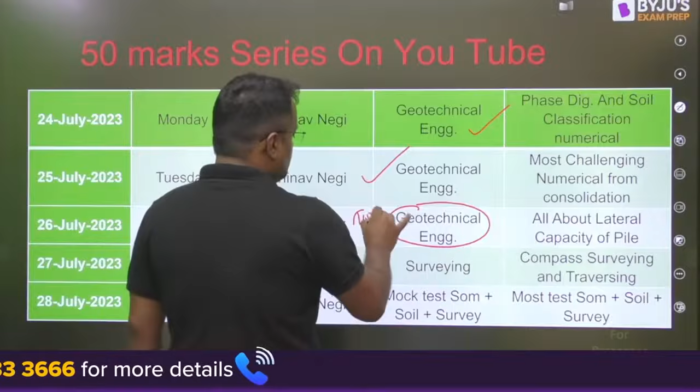So guys, in this 50 mark series, we have done phase diagram and numericals. We did consolidation numericals yesterday. Now we will be doing this today. Tomorrow and day after tomorrow, we will be doing surveying and a mock test on SOM, because I have taken SOM, soil, and survey in the 50 mark series, so that mock test I will be taking there.

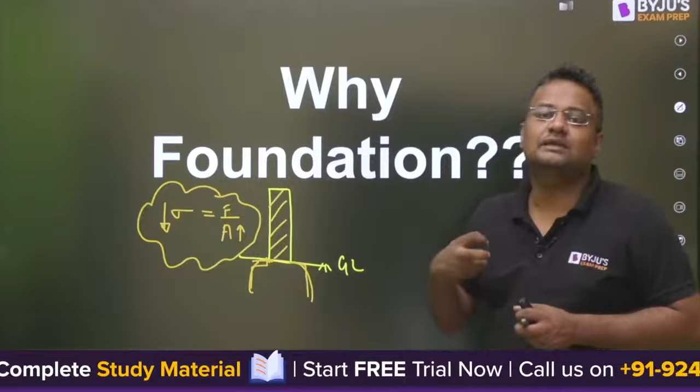So to make it distribute, soil is not as strong as concrete, so we make a foundation with larger area. Stress is equal to force by area, so we make a larger area so that stress is reduced, and this stress should be less than the bearing capacity of soil, so there is no failure. Mechanical engineer deals with force, civil engineer deals with stress. So we make a larger area so that whatever load is here can be distributed.

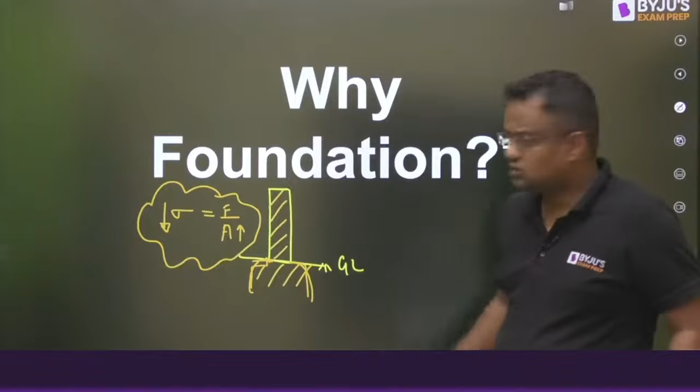Now next question is, what is shallow foundation, what is deep foundation? Suppose at shallow depth soil is not very strong, so either you have to make a very large area foundation. Why large area? Because soil at this shallow depth is very weak. But making a large area, you cannot go into the neighbor's boundary, and cost-wise also it will be uneconomical. So when at shallow depth soil is not very strong, or making a large area foundation becomes uneconomical, in that case we have to go for deep foundation, that is pile foundation.

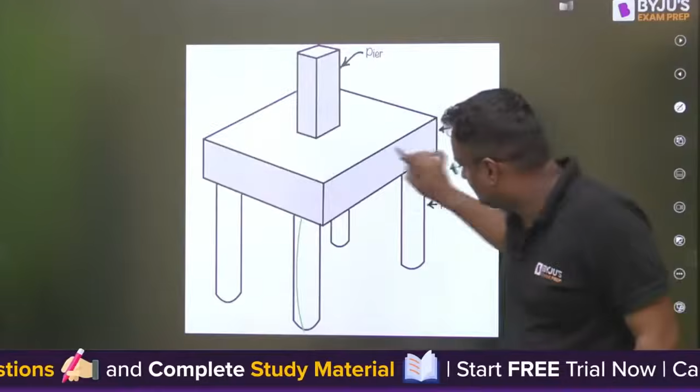Whatever the structures, this is the pile foundation, this is the load, and piles are made. Piles are made such that their end is at the hard strata, because soil at the shallow depth is relatively weak, so they are put such that now the soil is strong, and it gets reaction and bearing capacity from there.

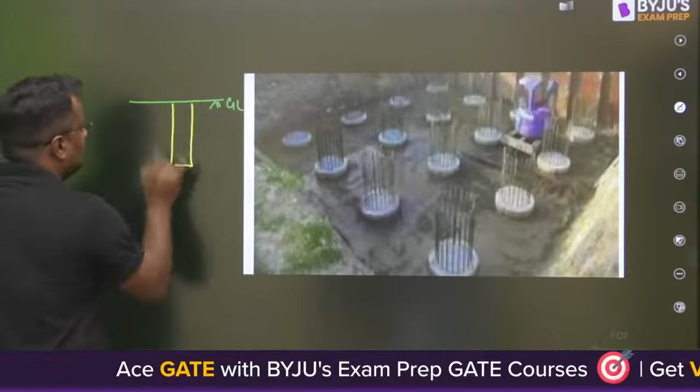Whatever the superstructure, these are the piles. How are piles actually helping? Suppose this is the ground level, and below ground level this is the pile, and load is acting from here, from the superstructure. So there are two ways the pile resists the load.

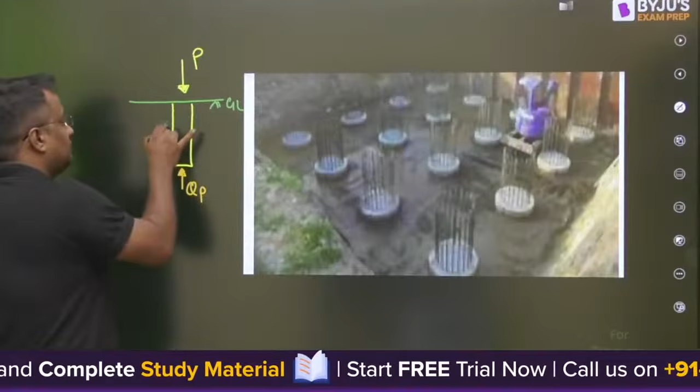One is from here, QP, from the end bearing capacity, if that is put in hard strata, it takes some load. And second is that this P load wants to push the pile downward, so friction will act upward. Friction is opposite to the relative motion. Due to the superstructure load, the pile wants to go downward, so upward friction load will act, that is QF. So whatever load comes from the top superstructure will be resisted by the end bearing and by friction.

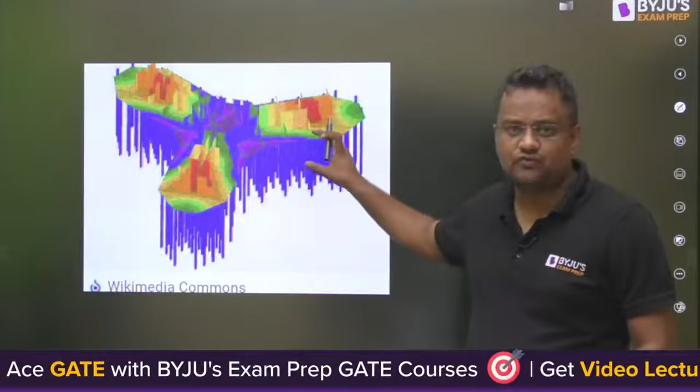Whatever the large structures, skyscrapers these days, like Burj Khalifa or any tall building, even in Burj Khalifa there are hundreds of piles. This is the buttress system of Burj Khalifa. Burj Khalifa has a certain architectural concept called the buttress system, something like this, and these are the piles. I guess 200 or 600 piles are there, resisting the huge load of Burj Khalifa.

The architect of Burj Khalifa has said that with this buttress system, with this core, with this structure, even up to 4,000 meters, 4 kilometers, a building can be made. But of course there are certain drawbacks, that above, atmospheric pressure will be very less. When a person goes up, he may feel dizziness, as certain tourists feel in Leh Ladakh, because atmospheric pressure is less there. So 4,000 meters would mean a considerable difference in that building if theoretically it is made. Burj Khalifa is not that much. So there are some structural drawbacks, and human limitations are also there.

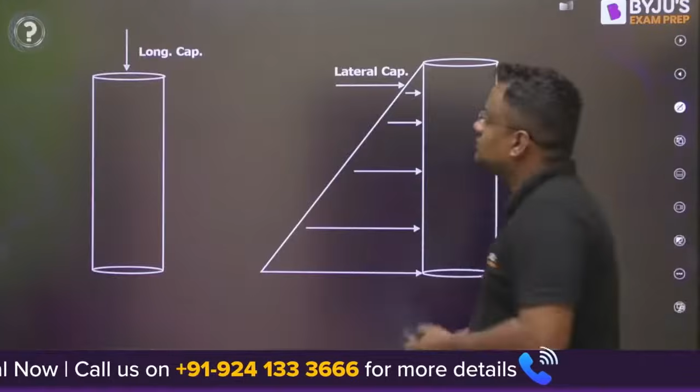Now, whatever you have studied till now in the GATE syllabus is the longitudinal capacity. You studied QU load acted by point bearing and friction, QP and QF, for individual sand pile, individual clay pile, and group actions of piles. That is the longitudinal capacity, in the direction of the superstructure dead load, that is, the direction of gravity. Now the newly added topic is lateral pile capacity.

Guys, lateral load can also be coming. Suppose this is the pile and this is the ground level. Lateral load can also come, due to various things.

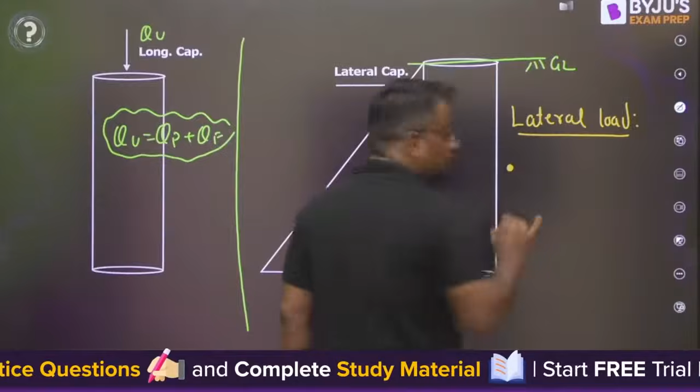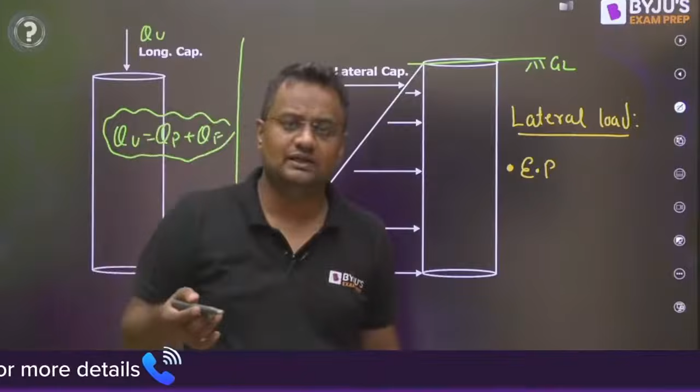Suppose earth pressure is one reason. Since soil is here, from here earth pressure will be there. At any point in the soil, there is a vertical stress sigma V, and similarly there is a horizontal stress sigma H also, that is Ka into sigma V, or Kp into sigma V, or K naught into sigma V, depending on case to case.

So due to earth pressure it can come.

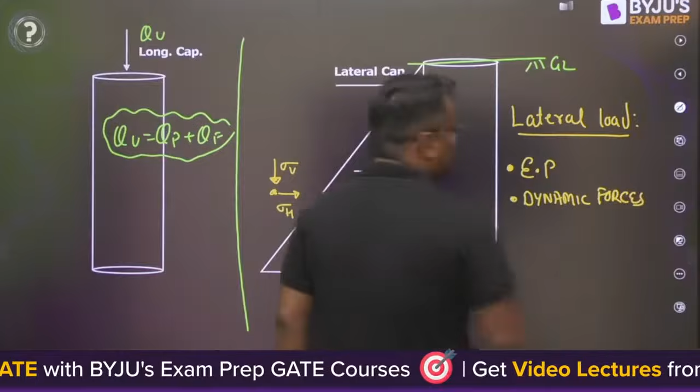Due to the dynamic forces such as earthquake, coming from the epicenter - earthquake force is not directly coming vertically above, the shock waves are not coming only vertically, no.

Okay, hello Priyali, how are you?

So the load can come from the earthquake in any way, so due to dynamic forces also, the load can come.

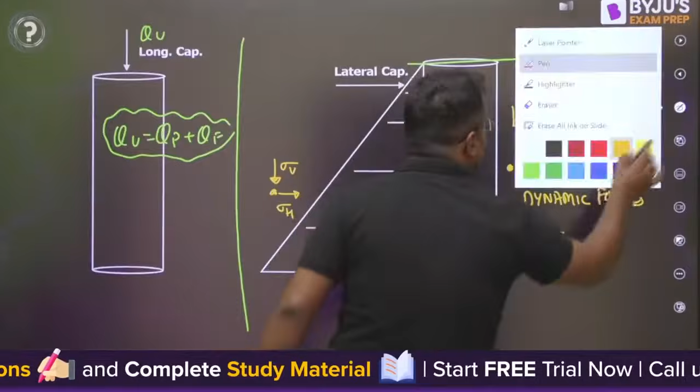Now due to the groundwater table, suppose somewhere here there is a water table. At this point, if the pressure is gamma WH in this direction, then gamma WH in this direction also, because water is hydrostatic - water exerts hydrostatic pressure equally in every direction. So due to the water table, lateral load can come.

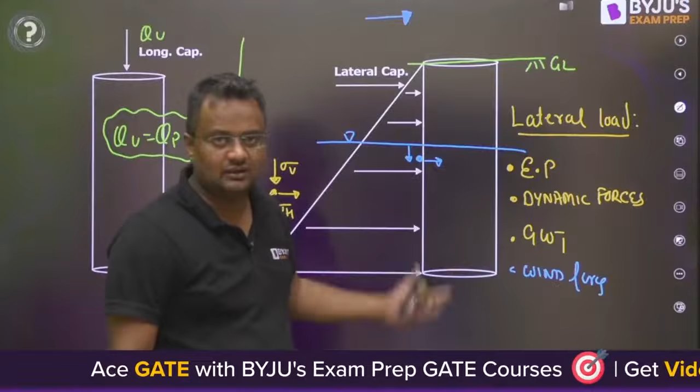Okay, due to wind forces also. Wind will not be below ground level, but wind will be acting here, and whatever wind load is exerting force on the superstructure in the horizontal direction, a bit of that effect will also come in the piles. So due to that also, lateral load can come.

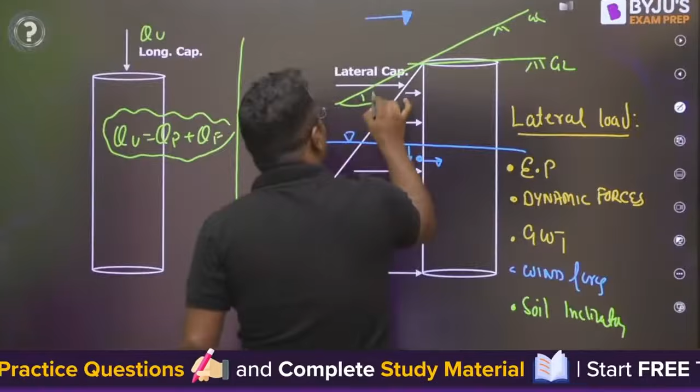Now one more thing, due to soil inclination. Suppose the soil is not exactly horizontal, suppose the soil is inclined with a beta angle. Now the mg sin beta, the weight component, will also be providing lateral load.

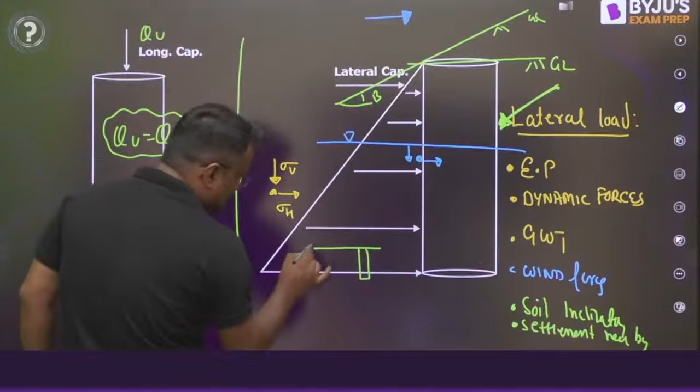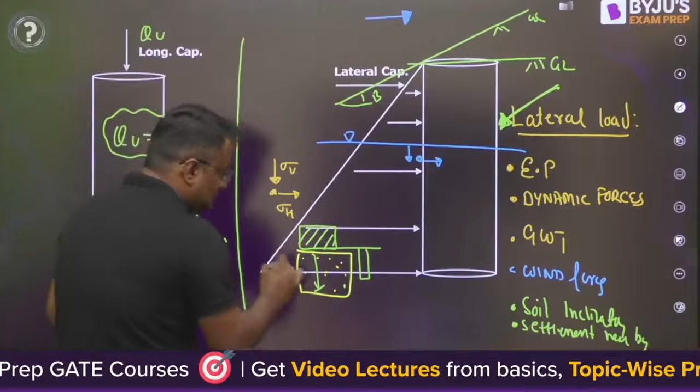Now due to settlement in a nearby area - suppose here is a pile, here is another pile, and here the load is due to some superstructure, so this region is settled. Due to Poisson effect, if it is compression here, it will be elongating there. So I am talking about this particular region of soil. Due to this weight, if this settles, due to Poisson effect it will expand like this, and when it expands, this green pile will be exerting horizontal forces.

So due to various reasons - there are these and numerous other reasons - due to which the lateral load will be coming.

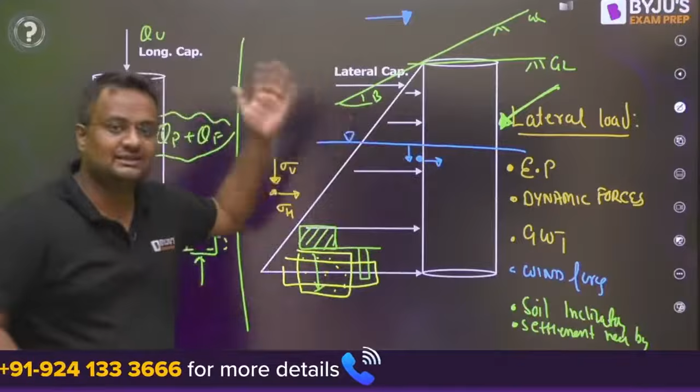Now, up to now, if somebody asks you, this is the pile, this is the dimension, this is the material, what load can it carry, what do you do? QF plus QP. But that load is in the longitudinal direction. If somebody asks, this is the pile, this is the diameter, this is the length, this is the material, how much horizontal load can it carry, you don't know till now. This particular session is about the horizontal loads.

Okay. Thank you Priyali Sharma.

So this is something I never taught before, you can see this. Now for lateral capacity of pile, various models come. The first one is the Winkler's model.

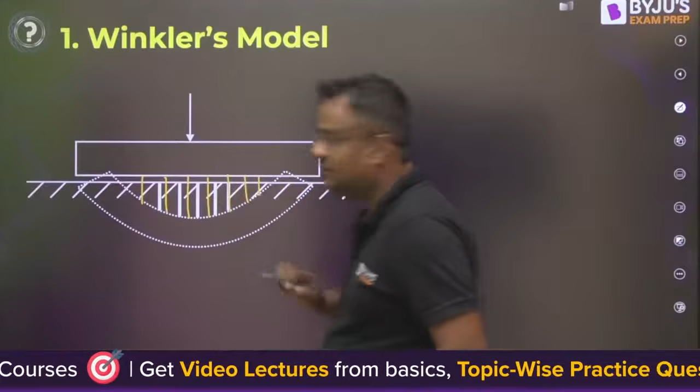What does this say? If there is a beam and you apply load, then deflection at every point will be different. It says P is equal to K delta, P is equal to K delta, and you can assume this slab to be supported on various springs, as delta P is equal to K delta, and as delta at every point is different - here delta is something else, more delta, less delta, less delta, less delta.

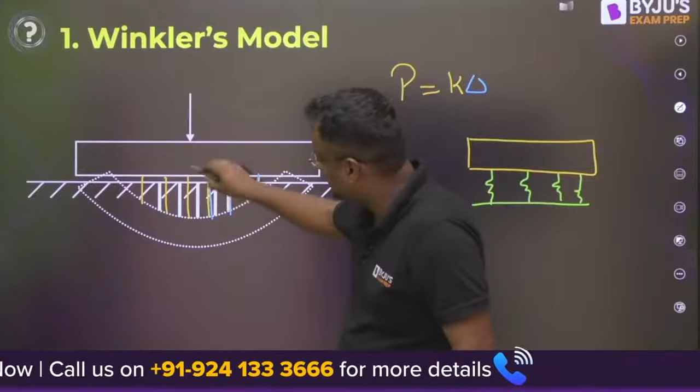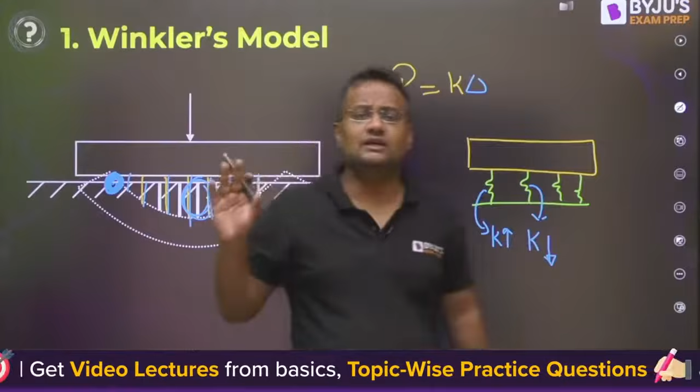As delta is different, K (stiffness) will also be different at every point. Where deflection is less, if you assume this soil to be a spring, that soil will be having higher stiffness. Here, near ground level, deflection is more, so K will be less because deflection is more. At the ends, deflection is less, so K is more. This is what Winkler's model says: assume every soil to be a spring - we call this spring analogy - and find the stiffness at every location.

The same thing can be done in lateral pile capacity. When the pile is like this, you are applying the load like this. If you assume all these soils to be springs, you can find from the stiffness value how much load the pile can carry.

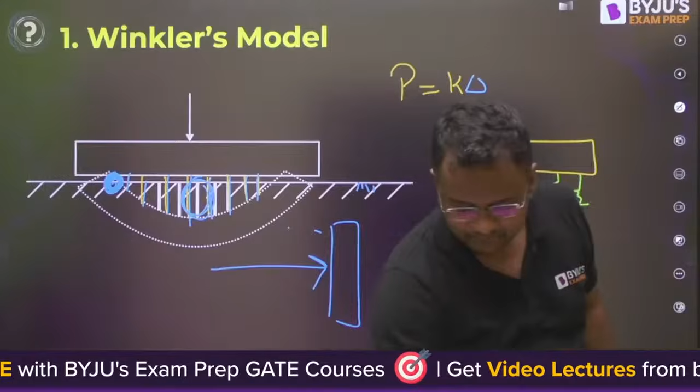Now another method is Terzaghi's. It says that P is equal to K into delta - the load will be K into delta. He called this KH, the modulus of subgrade reaction.

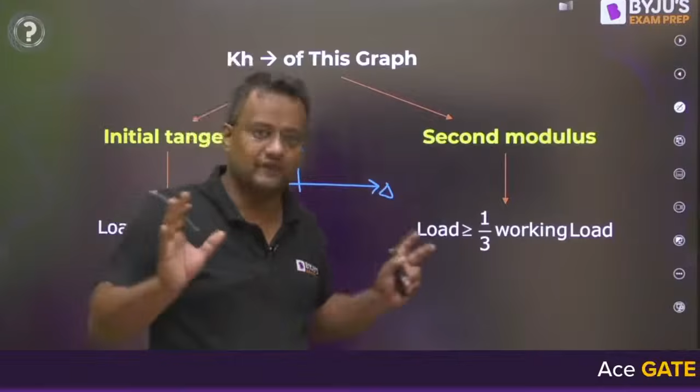He says there are two methods for finding K. One is that whatever pile it is, draw a P-delta curve. Apply the load and see what is the deflection. You are not applying the load in the pile which is below a house or building - this is during the testing phase. In the testing phase, insert that pile in a location, load it in the horizontal direction, and find the deflection. We are in the testing phase, not construction. So there might be some curve like this.

Now the initial tangent will be the KH - draw the initial slope, that will be KH. Then draw some other two points - this will be the secant modulus, not second modulus, the secant modulus.

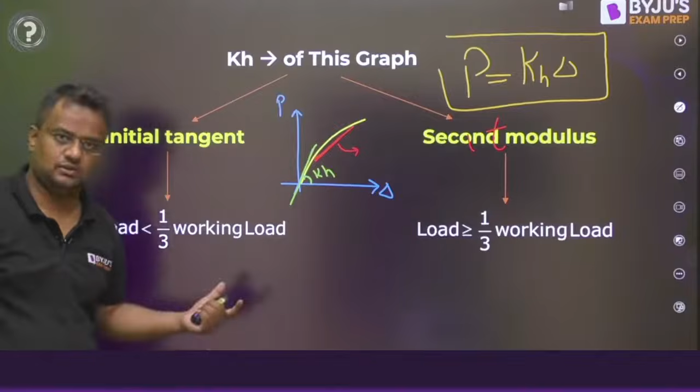Now if anybody asks how much load you can apply on this pile, the answer is KH into delta. What is KH? If the load is less than 1/3 of working load - working load meaning the load about to come on the building - you take the initial slope KH. If the load is greater than or equal to 1/3 of working load, you take the secant modulus, whatever slope comes there.

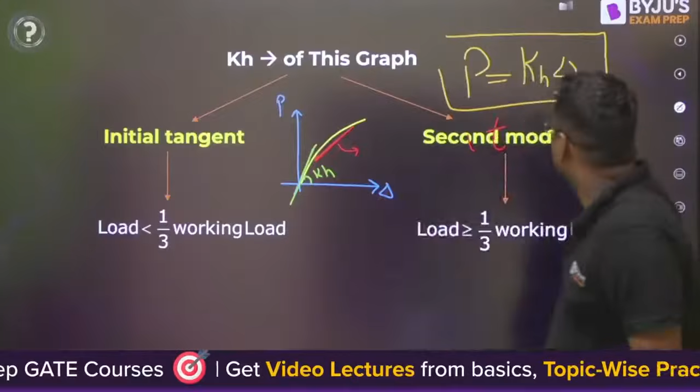Now again, Terzaghi's method is also not widely adopted, because here what is delta? What value of delta do we have to take? We don't know anything about that.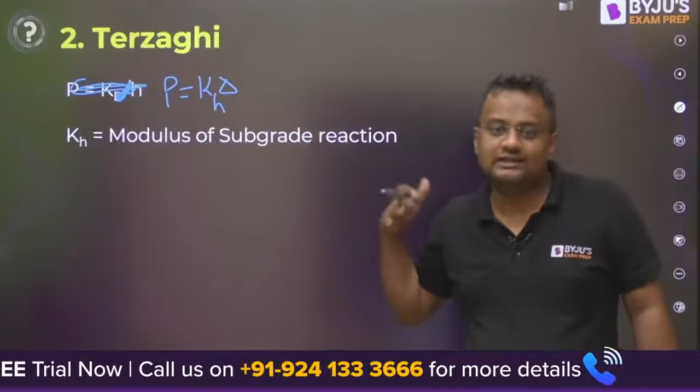Now the class is starting from here. Whatever I taught you till now is all rubbish, not coming in the exam. I am just telling you that for lateral capacity, Terzaghi gave some theory but it's not widely adopted, and Winkler gave some theory but that's also not widely adopted.

Now what is widely adopted is the Matlock and Reese theory. First of all, Matlock says that there are two types of pile - one is the free head pile.

Another is fixed head pile. Okay, now what is free head pile and what is fixed head pile?

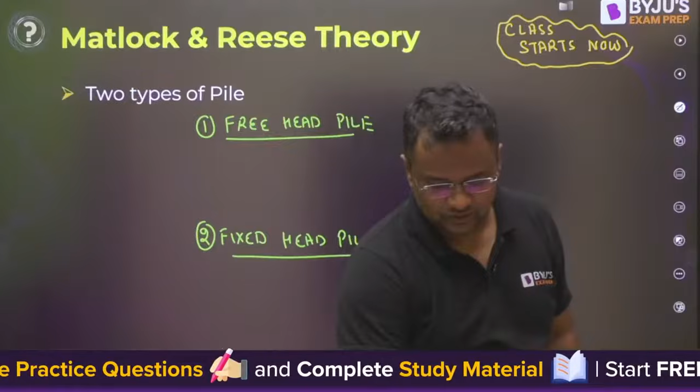Can anybody tell me in the comment section? Say something, what is free head pile and what is fixed head pile? Okay, no? Let me tell you. No worries, you might be studying this for the first time.

Now see, the free head pile is, suppose this is a pile and this is the ground level. You are applying some load on this. This is the lateral load. We are not talking about vertical load, that we have already studied. Now, if the deflection is something like this, that is free head pile.

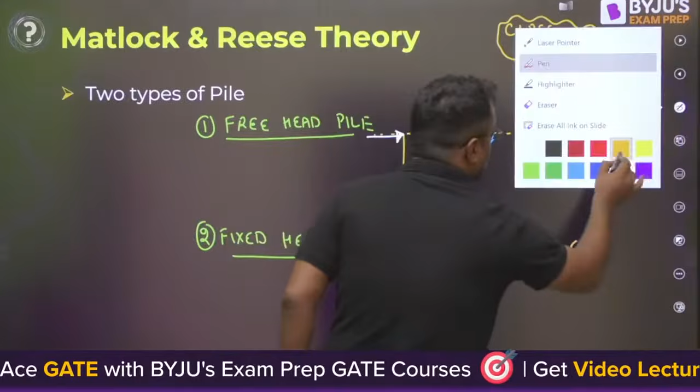What is fixed head pile? After this only you will understand free head also. Suppose this is the ground level, and in this ground level, suppose this is the pile. In this pile, suppose you are applying some lateral load at the ground level, and its distribution is like this.

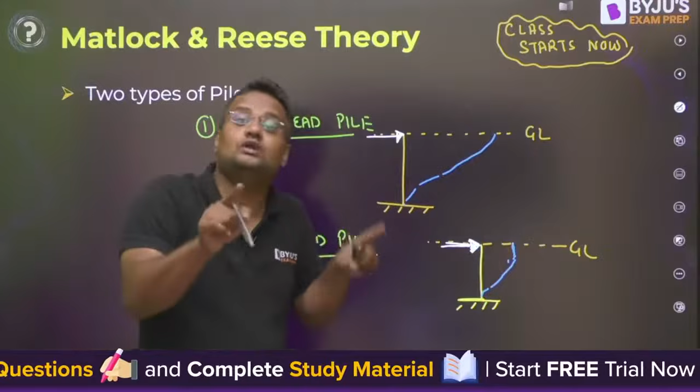In fixed head pile, the slope at the ground level of the pile is equal to the initial slope. If initially it is making 90 degrees to the ground level, then again it is making 90 degrees, that is fixed head pile. That means, like in fixed head, slope is 0. In a fixed cantilever beam, at the fixed support, slope is 0. So here, whatever the slope was initially, it has not changed. From the vertical line, the angle will still be 0, or from horizontal, it will be 90 degrees.

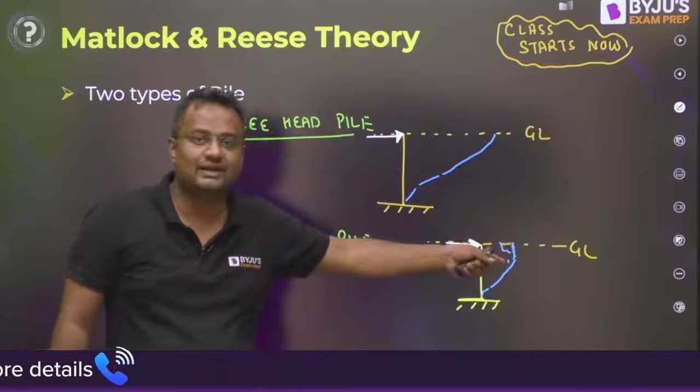Okay, but here some slope is changed. Earlier it was some different angle, now it is some different angle. That is free head pile.

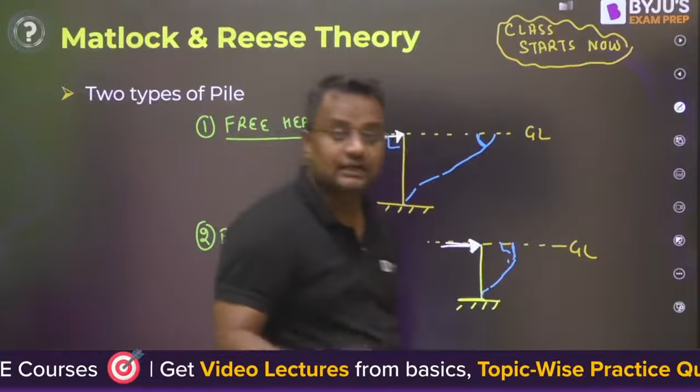Now, whatever Matlock theory I will be telling you, that Matlock theory is only applicable for free head pile. Many people will not tell you this. Matlock theory is only applicable for free head pile, for long piles, free head pile.

But we will apply it for fixed head also with slight modification. What is that modification? I'll tell you at the end, today only. With slight modification, we can apply this for fixed head pile also.

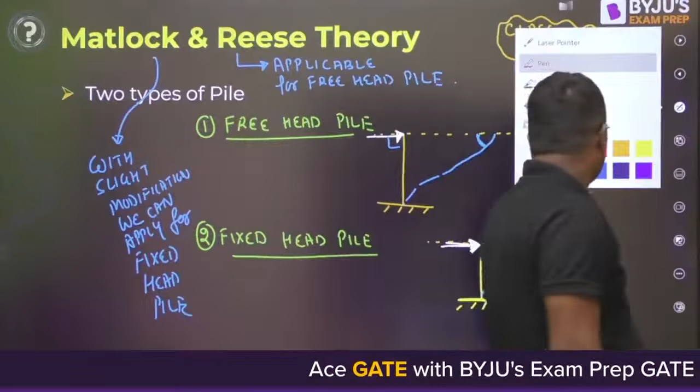See, now what is going to be here? Please everybody see, in fixed head pile, please see here that suppose this is our pile, and this is suppose the ground level. In this ground level, what we are doing is applying, suppose, load at the ground level is QG. QG represents G for ground.

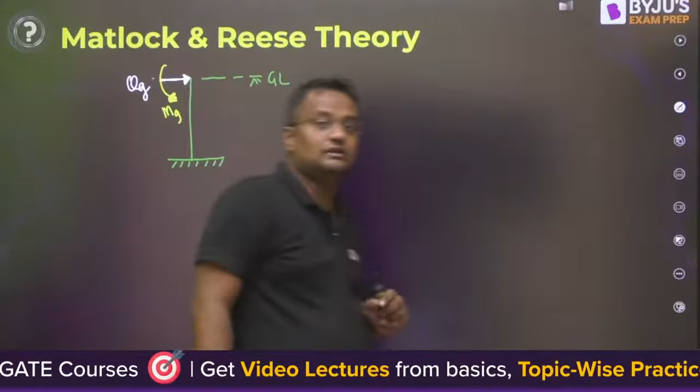QG is the lateral load at the ground level, and there is some moment also, MG, moment at the ground level. Due to QG, the load at the ground level, and due to MG, the moment at the ground level, this pile is going to deflect something like this. The deflection at the top or at any point is Y. At any Z depth, deflection is Y.

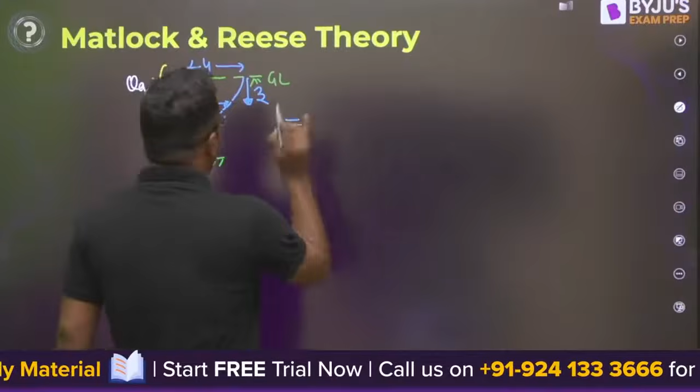Now, from the principle of superposition, this is the pile, and here the load is acting at the ground level and the moment is acting at the ground level. Due to load we will find a different analysis, due to moment we will find different things. Due to load and due to moment there will be different deflections like this, and suppose here at any point the deflection is YA, and here the deflection is YB. YA is due to load, YB is due to moment.

So total Y is equal to YA plus YB. Total deflection is YA plus YB. Now what YA and YB are, I will tell you. But before that, what are the things we want to find out? The analysis of laterally loaded pile.

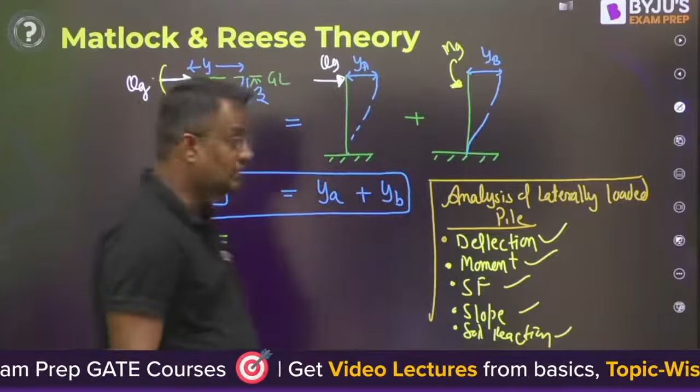Now y is equal to ya plus yb. Now see what Matlock and Reese has given, that y is equal to ya plus yb. Now ya and yb, let me tell you - ya, that is deflection due to ground level load, that y is equal to qg into t cube upon EI, that is Young's modulus of elasticity and I is the moment of inertia of pile material, into ay, ay is a coefficient. This is ya due to load.

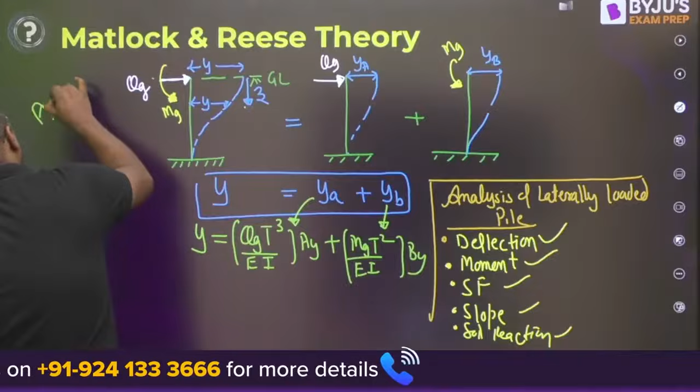Due to moment it is mg into t square upon EI into constant by. Ay and by will be given guys, these will be given to you. Ay and by you will already be knowing. So qg t cube upon EI into ay is a constant, mg t square upon EI into by.

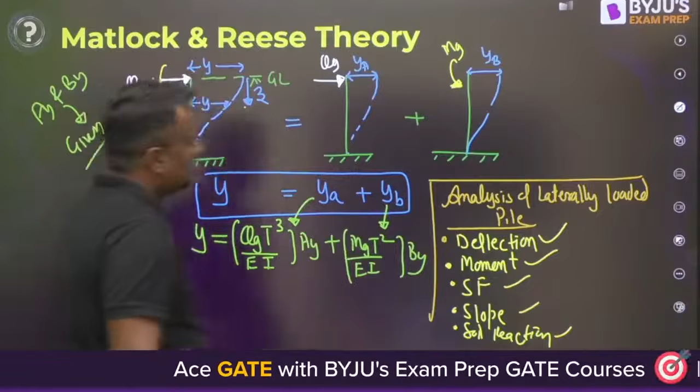Now what is t? Now after that the question will be what is t? Now see, t is equal to EI upon eta h, to the power 1/5. EI upon eta h, somebody writes its k also, to the power 1/5. E is the Young's modulus, I is the moment of inertia, and eta h is the modulus of subgrade reaction.

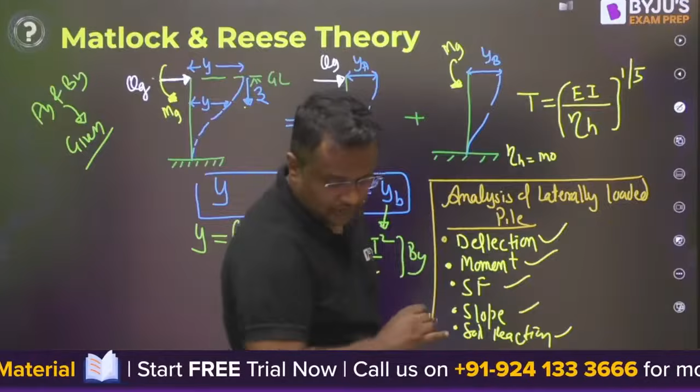Modulus of subgrade reaction. Okay, eta H unit will be kilonewton per meter cube, and unit of T will be meter. And you can verify this also, yaar. What is unit of E? Young's modulus is kilonewton per meter square. What is I? Meter to the power 4, divided by what is eta h? Kilonewton per meter cube. Okay, to the power 1 by 5. So what is this? This will be kilonewton meter square, meter to the power 5 into 1 by 5. This will be meter only. This will be meter only.

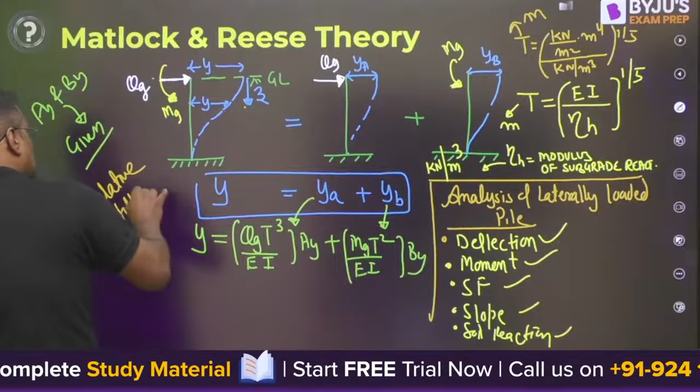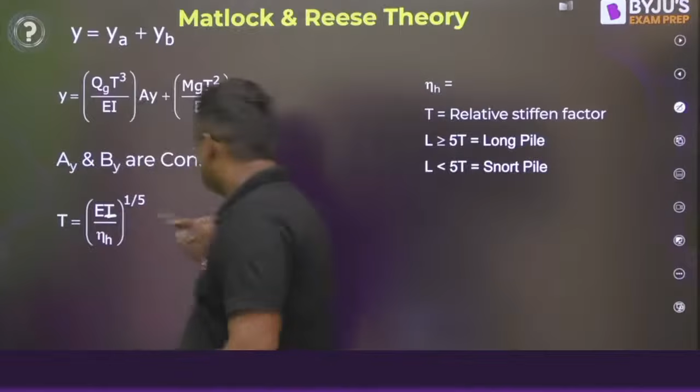Okay, so T is the relative stiffness. T is equal to relative stiffness. Let me write it clearly - this is a better writing. Qg into T cube upon EI into AY plus mg into T square by EI into BY, and the value of T is, this is EI, Young's modulus into moment of inertia upon eta h to the power 1 by 5. T is the relative stiffness. Eta is modulus of subgrade reaction, I already told you. Unit is kilonewton per meter cube. T has a unit of meter.

If length L is greater than 5T, then it is a long pile. If L is less than 5T, it is a short pile.

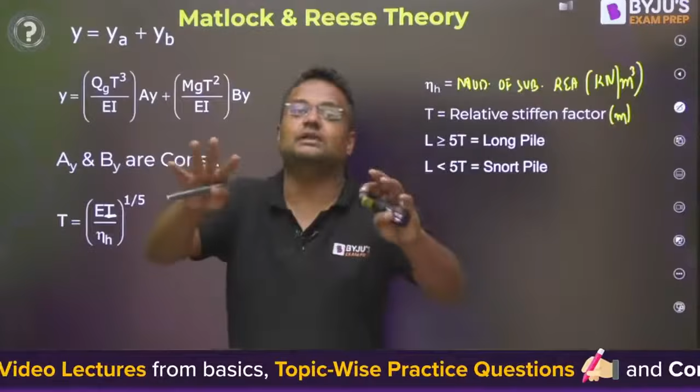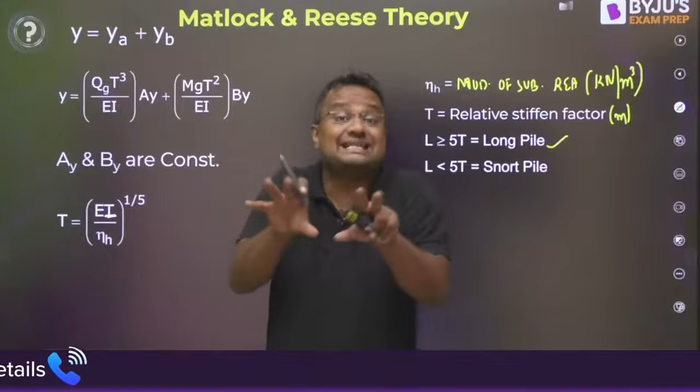And Matlock and Reese theory is not exact - whatever deflections you are getting now from here, this is deflection due to ground level load, this is deflection due to ground level moment. This will not be exactly same with 0% error compared to the real values. This Matlock and Reese theory values are very near to the real values. Actually these are not some derivable formulas that I can derive for you, these are based on certain assumptions. So they are very close to the real values, and in fact for long piles they are even closer. Whatever values you are getting here will not be exactly same as the real deflections, but they are closer, and for long piles it has been observed that they are much closer to the real values than when compared with short piles.

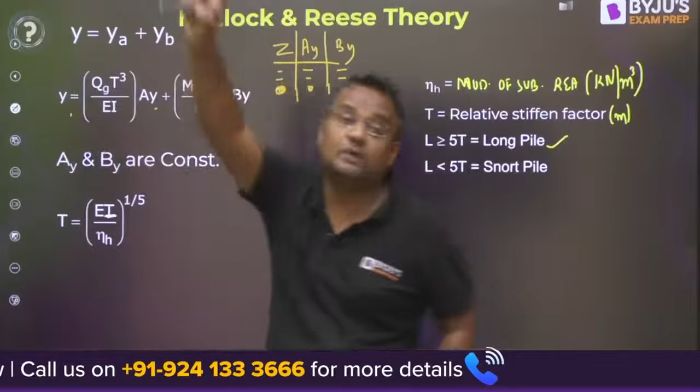Z is equal to 0, what are the values? Z is equal to 0.1, what is the value? Suppose you want deflection at Z is equal to 2.2 meter. So from here, for 2.2 meter, what is the AY, BY? Put that AY, BY here, then you will get the deflection corresponding to that Z. Z means depth, so for different depth, AY and BY will be different. So whatever depth you want deflection at, the corresponding AY and BY you have to put here.

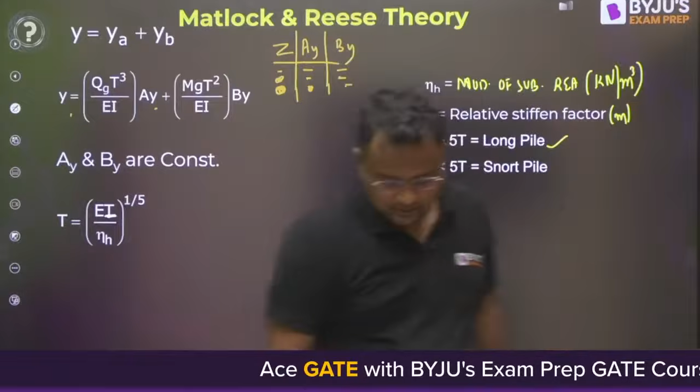Now this is about the deflection, and most probably this is what will be coming. Otherwise, if you don't want deflection, if you want moment - now what is moment? I hope you remember, in the double integration method I told you, it is EI d2y by dx2, differentiated 2 times.

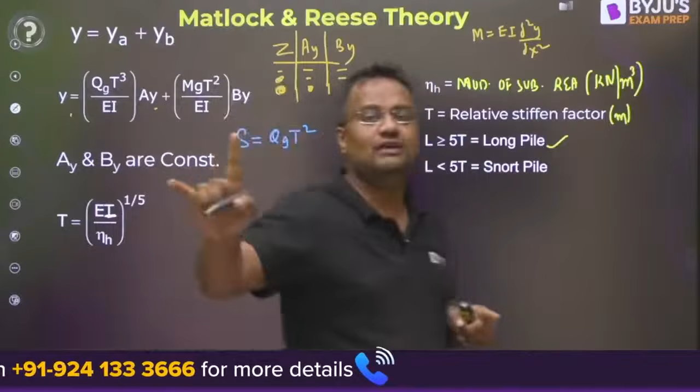Okay, m is equal to EI d2y by dx2. Or even before m, let us find slope. Slope is dy by dx. So differentiate it, so qg t square. It will not be 3t square, because the real values are not coming with 3, it is coming with t square.

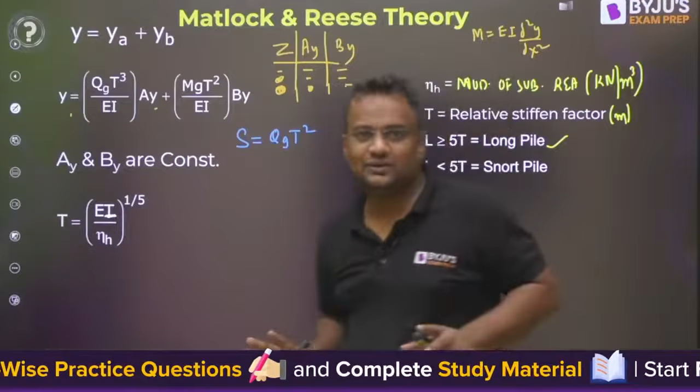It has been observed, there is no derivation I can give you for why I have done t cube differentiation as t square, why not 3t square. That 3 will be coming in the constants given by Matlock and Reese, there is no derivation for that. This is just a process you can learn. This will not be 3t square, because they must have tried with 3 and seen. There's theory, and there's theorem and law, you understand the difference. Law is universal. Theorems are proven, exactly proven. Theory is based on certain assumptions, not exact. Laws like Newton's law, gravitational law are universal. Theorems are proven exactly, but theories are not proven.

So it is not 3t square, it is t square upon EI, and some different slope will be coming, AS. Plus, differentiating again with T, mgt upon EI into BS. This is slope.

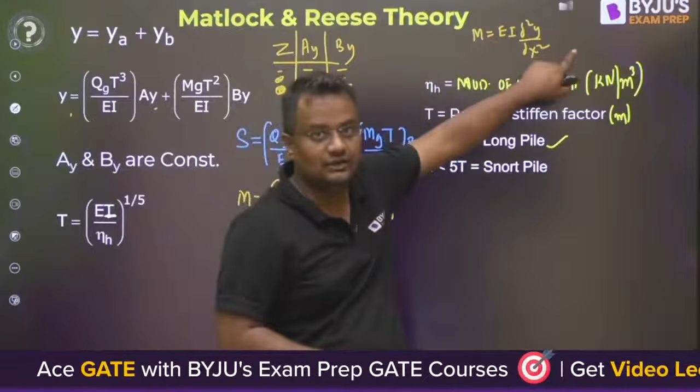Now moment. Moment is d2y by dx2, differentiate 2 times and one more EI, so one EI will be cancelled. So differentiating 2 times, it will be qg t into moment AM plus mg, differentiation will be mg - EI will be cancelled na, since M is EI into d2y by dx2, when EI is multiplied this gets cancelled. So it's mg into BM. Give me yes or no, everybody. It will be qg t into m, mg BM plus shear force.

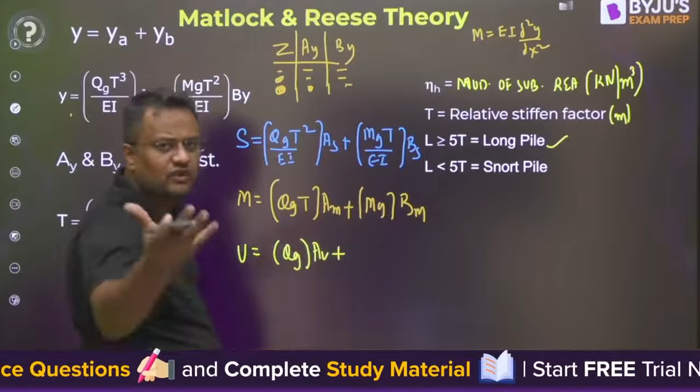Shear force is dm by dx. So differentiating, it will be qg into AV, mg into t to the power 0. Just a way of remembering, they are not derivable. mg into t to the power 0, so t to the power 0 will be mg by t. Differentiation of x to the power n is x to the n minus 1 na, so t to the power 0, so 0 minus 1 is 1 by t. Otherwise if you differentiate with t it should be 0, but this is the process of remembering. I already told you, this is theory, not a law or theorem that I can derive. On certain assumptions it has been seen that the answer doesn't match practical results with 0, so they found mg by t works, into AV, and 5 things are asked.

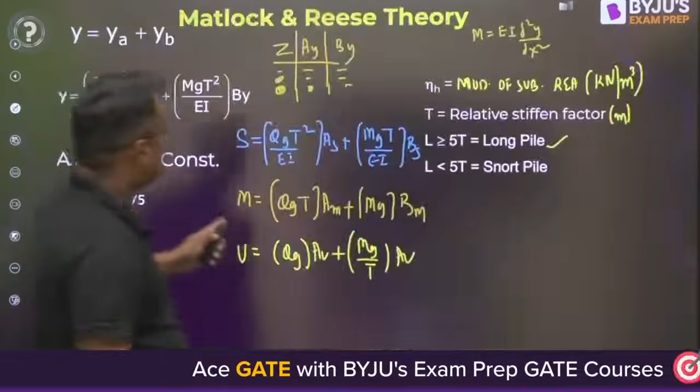1, 2, 3, 4, 5. So what we have found out is y, 1, 2, 3, 4, and now load, that is soil reaction, W. Again differentiate with t, so it will be qg by t into AW, AV constant - these are all constants. It should be BV, and mg t to the power minus 1, t to the power minus 1 differentiation will be 1 by t square into BW.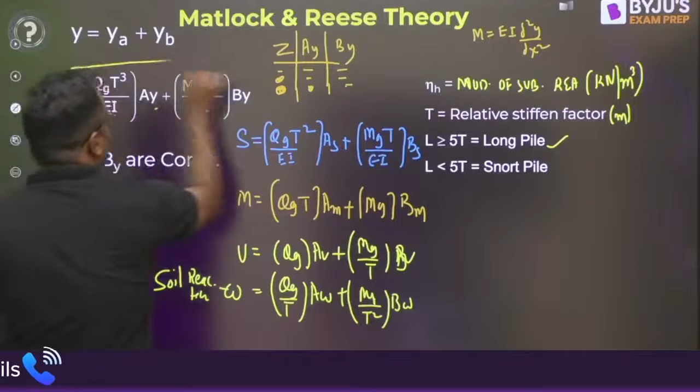These constants' values will be given at different Z. AY, BY are given at different Z's. AM, BM are given at different Z's. AV, BV are given at different Z's. For whatever Z you want - shear force, moment or load - accordingly you can find it. So this is most expected to come. Have you understood? Okay, now let us take a question, guys.

This one please, if you want some, what is asked? What is relative stiffness? Relative stiffness, if you forget the formula, is E into I by eta h, modulus of subgrade reaction, to the power 1 by 5.

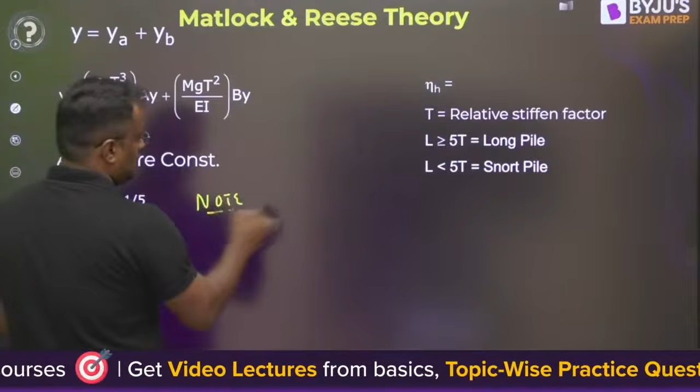Okay, now guys, one more thing I want to tell you, that all these formulas, note, all previous formulas are for free head pile.

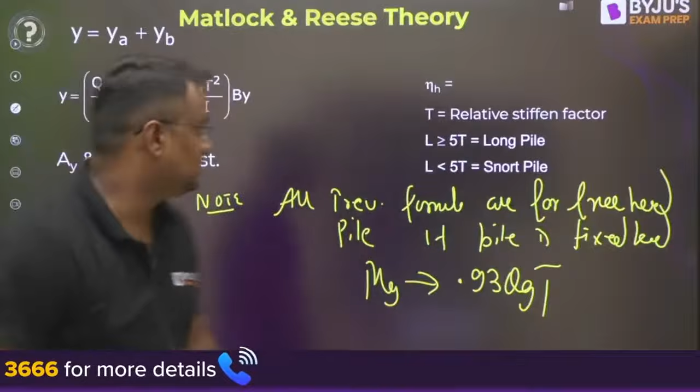Free head pile. If the pile is fixed head, you just have to replace, wherever mg is coming, with mg by 0.93 qgt, 0.93 qgt, and then the formulas are same for fixed head piles also.

Now after this, let us consider the same question, same values, so T will be 1.5, meaning the relative stiffness value will be 1.5, relative stiffness value will be 1.5.

If the pile is considered to be free head pile, then the maximum deflection will be, so y is equal to ya plus yb. Ya is the deflection due to load, so it will be qg t cube upon EI into Ay plus mg into t square upon EI into By.

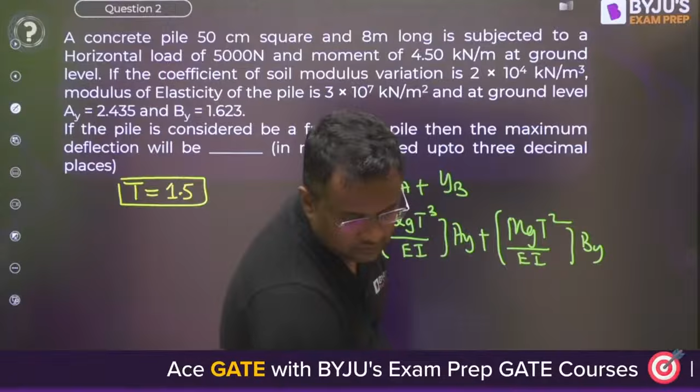Okay, this is qg t cube upon EI, Ay, plus mg t square upon EI, By. Every value is given, every value is given, you can easily find out.

Two, Ay and By are given. For any z, the corresponding value is given. What is qg? Qg is 5000 Newton. What is mg? Convert it to Newton meter so that everything is in SI units. Put in E and I.

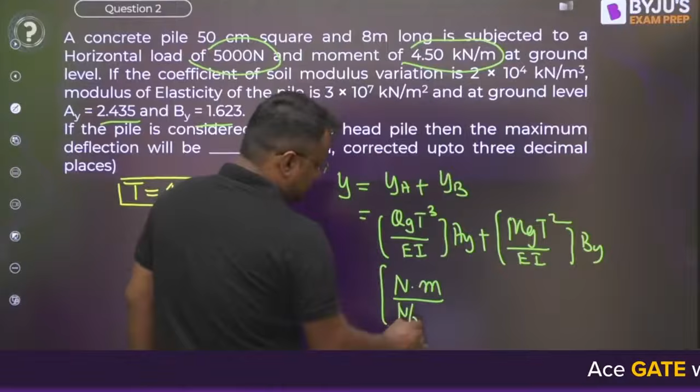It will be coming, what is this? Suppose this you put in Newton, this you put in meter, this you put in Newton per meter square, this in meter to the power 4. T is meter, so T cube will be meter cube, so it will be coming meter cube, meter square, meter. Yes, this is coming meter. Excellent, answer will be in meters.

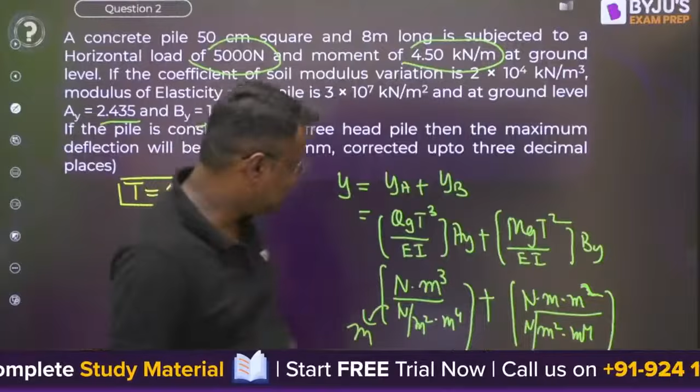You can put everything in these units, it will be in meters. Similarly, mg, put in Newton meter, this is kilonewton meter, convert to Newton meter by multiplying by thousand. Then T square will be meter square, this will be Newton per meter square, this is meter to the power 4, By has no unit. So this will be Newton per meter square, meter square, meter square, it will again be meter. Yes, from here also it will be meter.

So every value is given, E, I, every value is given, you can find the answer. Every value is given, you can find the answer.